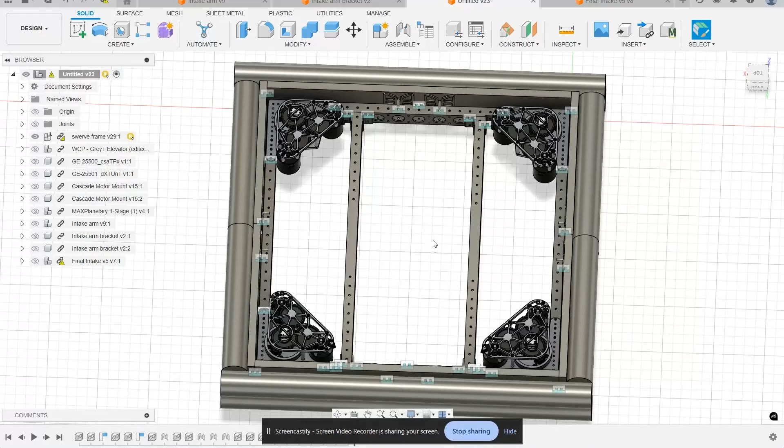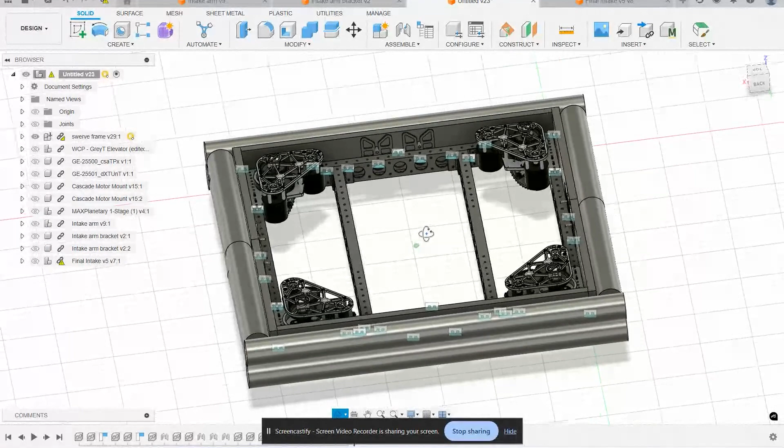So we started off this year with planning just our swerve bot. So we went through, made 3 or 4 different bots, or just the swerve frames, whether it was longer one way, shorter the other ways, just testing to see which layout we think would work the best. So we ultimately decided that we were going to go with a 29.5 inch by 29.5 inch square swerve bot this year.

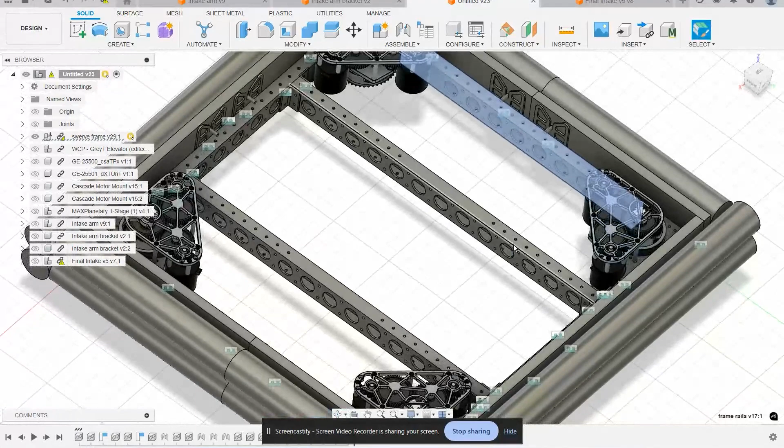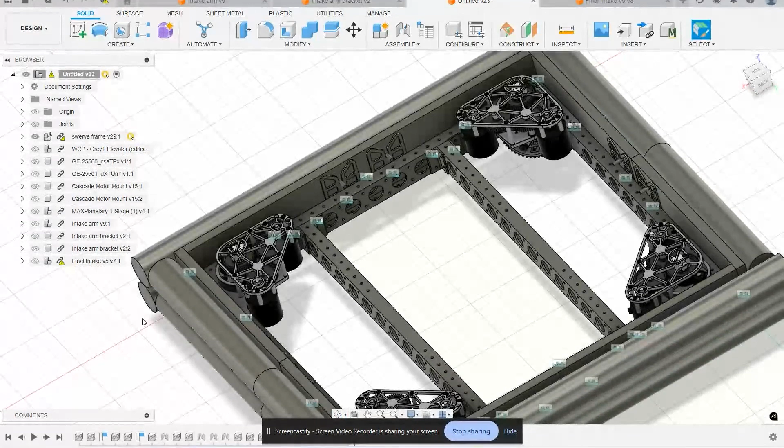So we went in and made all of these rails for the swerves, and we cut out weight reduction holes as well as mounting holes on the top and on the sides, and then we copied that same pattern on the sides of the long ones that go through the middle for us to mount all of our superstructures on top of. And so we decided that our lift mechanism for our intake would be an elevator.

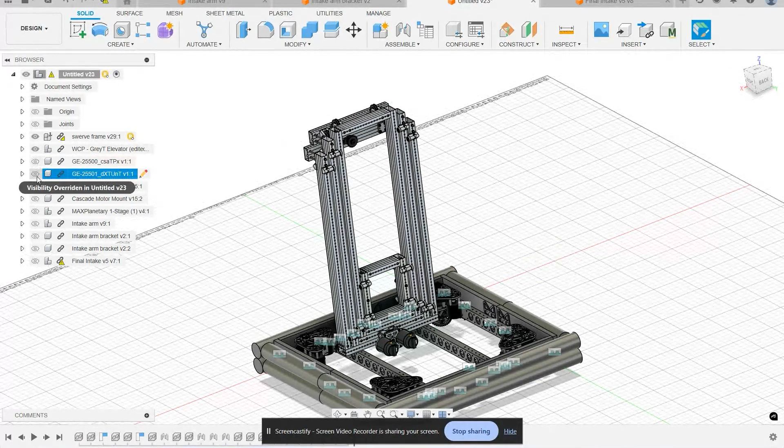And so we, in a separate file, modified the elevator to be shorter so that we would be under the height maximum. So we had to cut down 15 inches from each of the stages, and then we were going to make a pivoting arm in the middle of the elevator to be able to move our intake up and down.

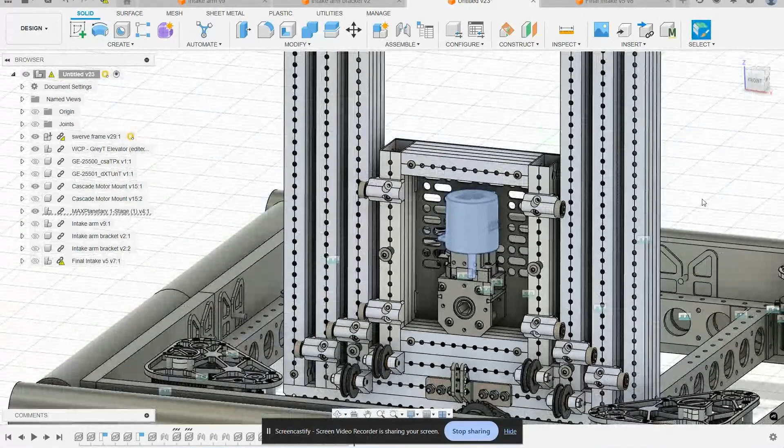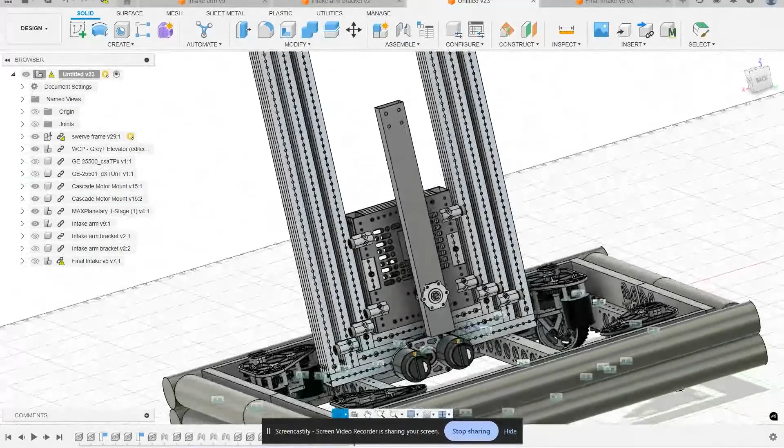So we have a MAXPlanetary 90-degree gearbox in here with a 9-to-1 and a 5-to-1 cartridge to be able to articulate the arm. And then we designed these custom plates to be able to hold the gearbox in place inside the carriage. And then we have our intake arm that is able to move up or down based on what we need, whether we're intaking or scoring.

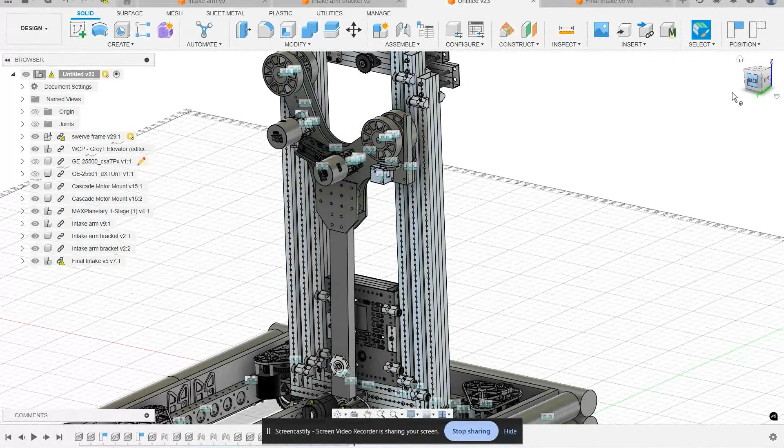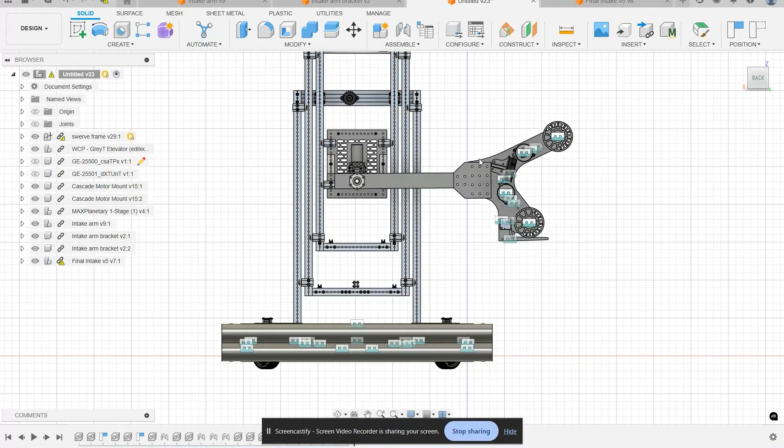And then this is our intake design. So whenever it's in the intake format, it'll be down on the ground to intake the ball, and then we'll come up a little bit to be able to intake the coral, and then up some more, as well as rotating the angle of the arm up for the human player station, and then we're able to reach all the way up and articulate the arm upward to be able to score into the barge.

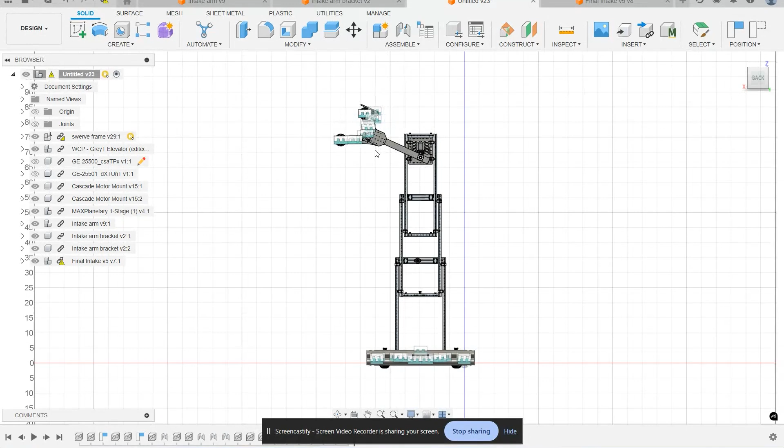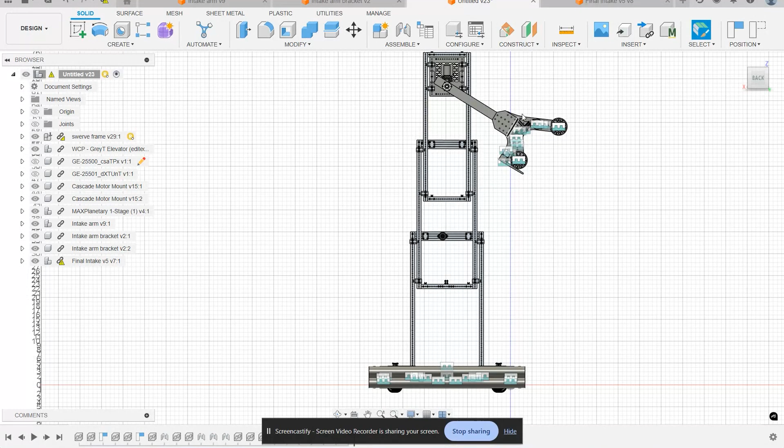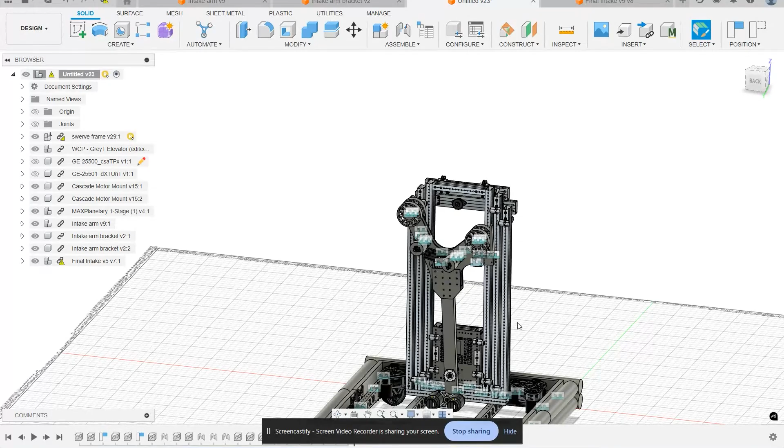And then for our scoring on the reef, instead of turning the robot around, we'll be rotating the arm all the way around and scoring with our intake upside down for L4, L3, and L2. And then we'll have to score L1 with the intake back at that angle. And so we'll be able to traverse the field with everything fully protected while holding a coral, as demonstrated here. So we'll be able to hold a coral in the intake here, and then be able to go around the field.

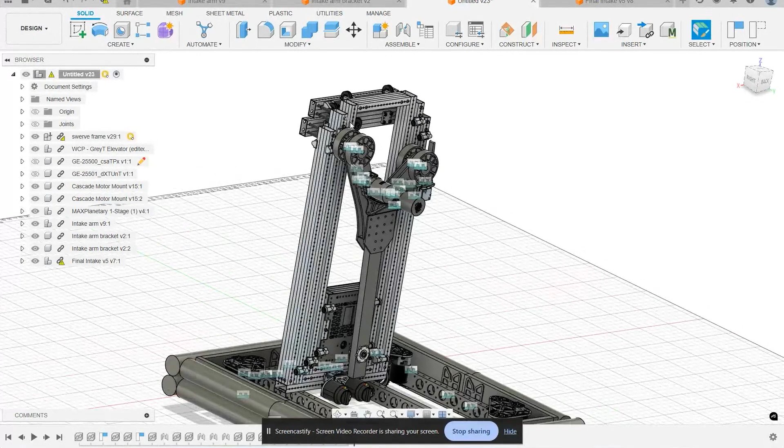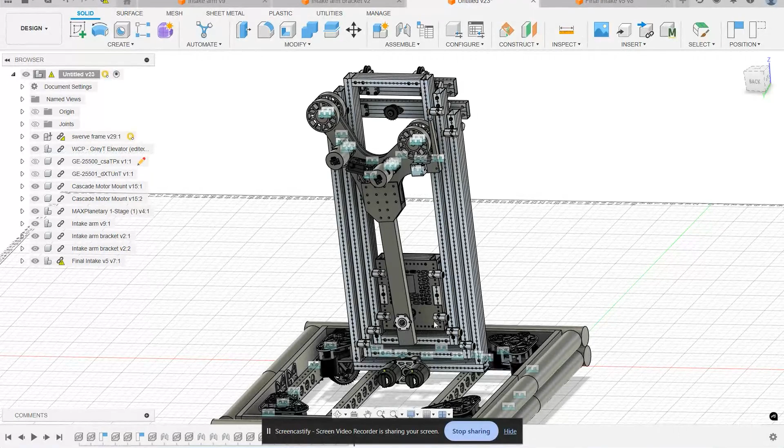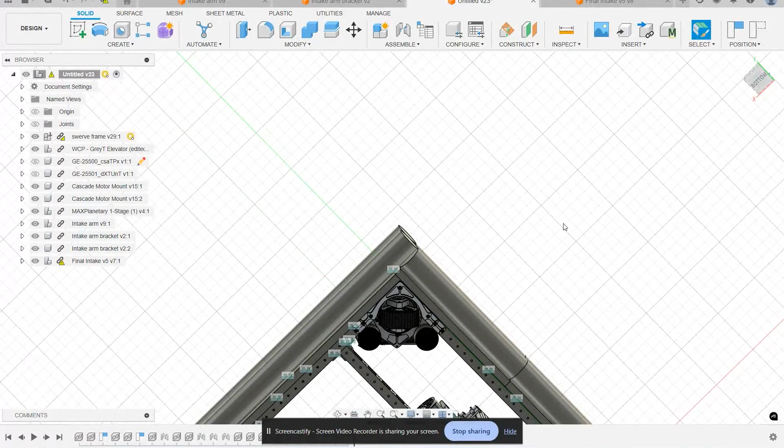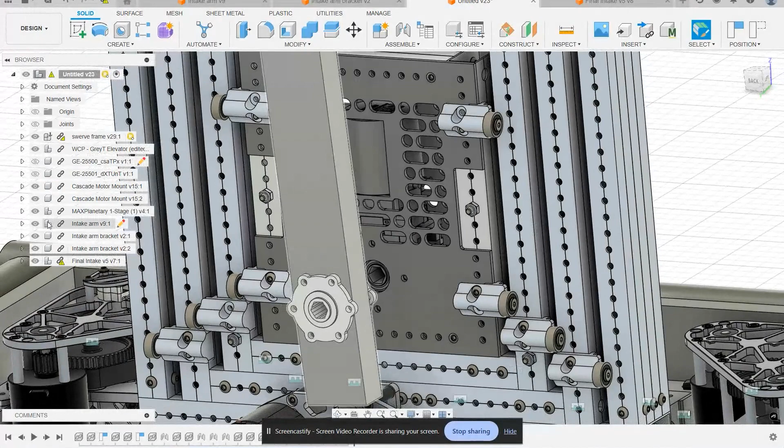Also, with being able to 3D model all of these, we were able to cut all of these holes for ourselves without having to purchase these pieces of aluminum from the manufacturers, which allowed us to save a whole lot more money on this elevator. Being able to have this three-dimensional model of the carriage as well allows us... let me move this real quick.

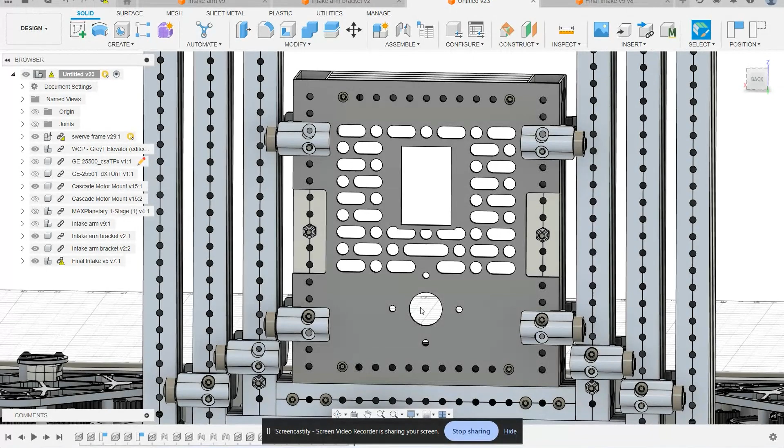Having the carriage allowed me to be able to design these motor mounts for the 90-degree gearboxes. So we have some weight reduction up here, and then we left it solid down here so that if there's any forces applied to the arm, it would have more structure down here at the bottom where the mounting holes are. And so having the accuracy of the physical model in Fusion 360 made it a lot easier for us to be able to visualize what we needed to make.

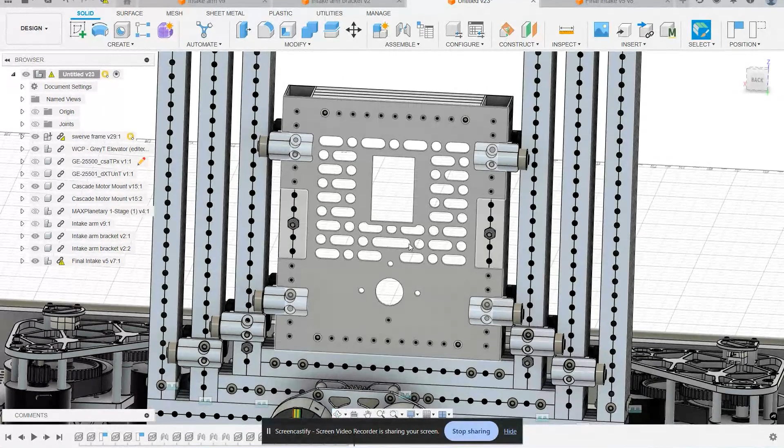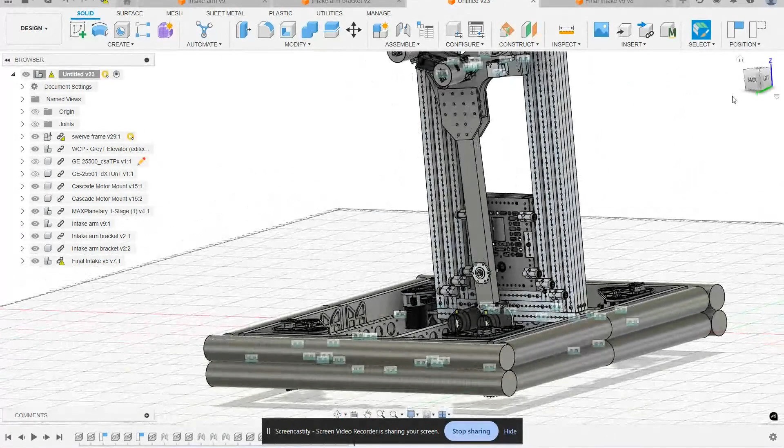And then there's certain things like the weight reduction in this plate that we would never be able to do just by hand drawing it and doing it with hand tools. So being able to go in and draw this in Fusion and then actually adding it to the robot makes everything a whole lot easier, as well as being able to test things like the geometry. So let me put the arm in the intaking position. So then we're able to bring in the actual game pieces themselves.

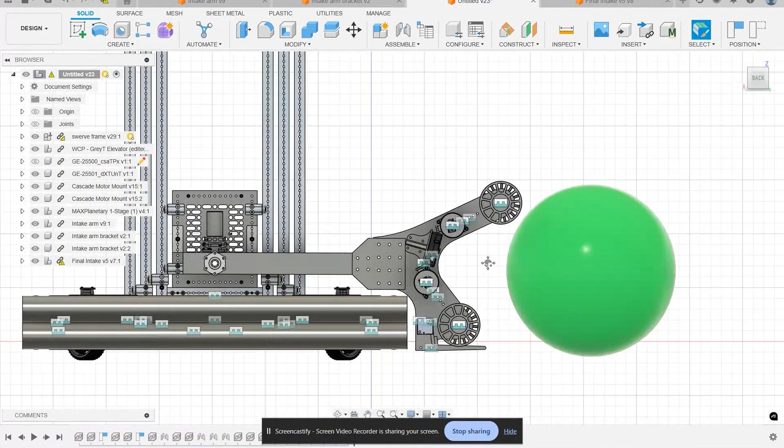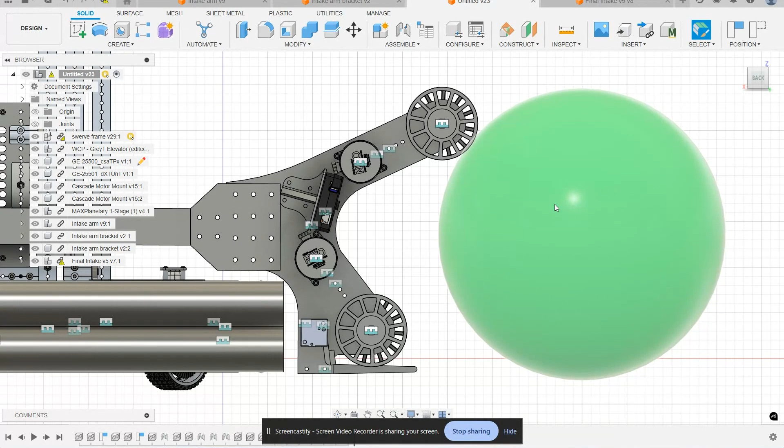So originally the distance between the centers of the top and bottom wheels was only 10 inches, and this top wheel was about where the outside edge of it is. And whenever we were testing it physically, and also here, the bottom wheels were actually blocking the ball from being grabbed onto by the wheels. And so all we had to do was extend the length of this arm and lower the angle down so that whenever the ball is on the ground, bottom equal with the bottom of the swerve wheels, the top wheel is actually the first wheel to come into contact with it. So it'll be rolling the ball towards the intake.

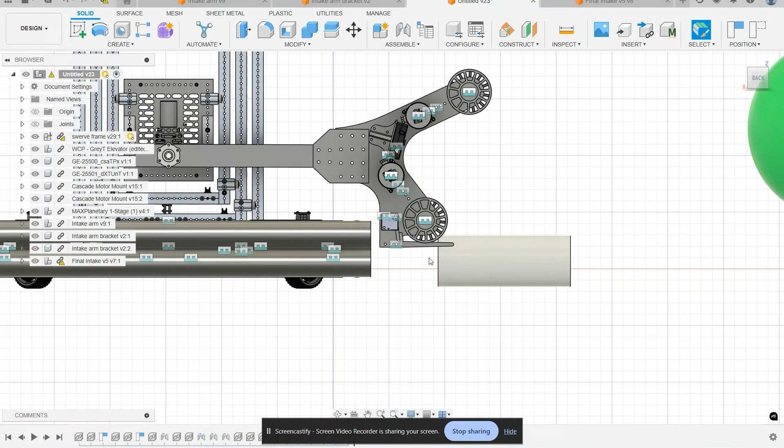As well as with the coral: if we have the intake at the same height as the algae, it would just slam into the wheels and it wouldn't be able to be grabbed onto. So we realized that our programmers were going to have to do 2 different presets for floor intakes so that the spear of our intake would be a lot higher. It's approximately 1.5 inches higher than what it was for the algae. Because if it was here, the coral would not be able to be grabbed onto by this top wheel.

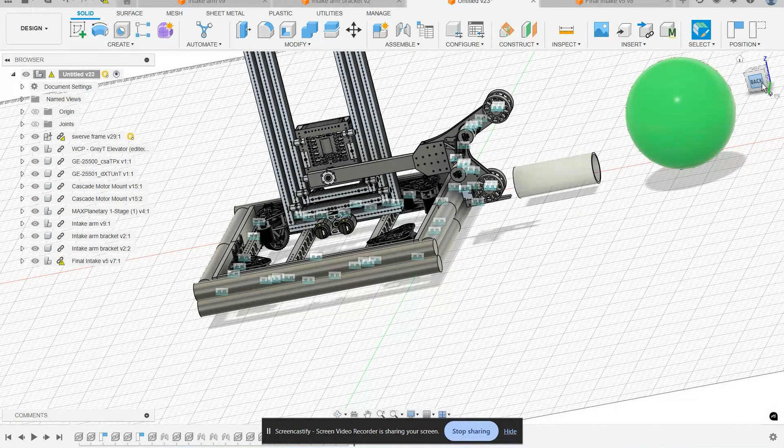So being able to have a three-dimensional model of these game pieces as well as our robot really allows us to see how the geometry of things is going to be, and if we need to make any modifications, we can go ahead and do that before we cut it out in expensive materials.